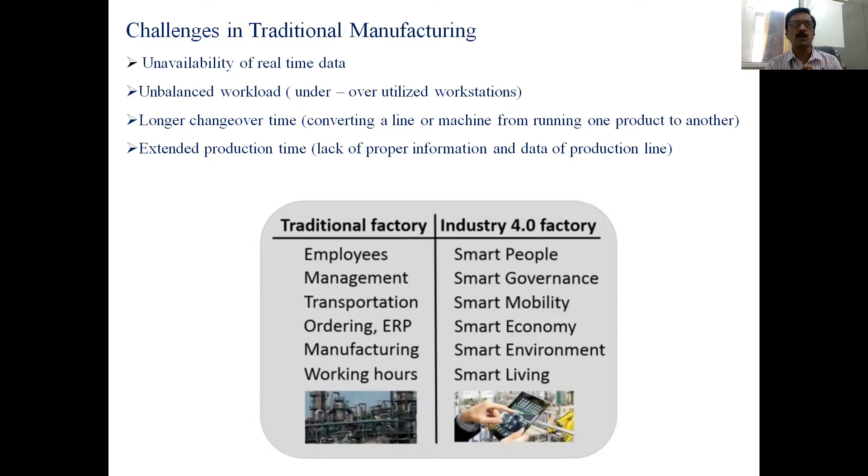There is extended production time, only because of the lack of proper information and lack of data of the production line. So if you just look at this traditional factory, we are having employees, management, transport, ERP, working hours, etc. But all these different parameters are not smart. Industry 4.0 expects all the things should be smart.

So what is a smart factory? The smart factory involves machinery and equipment which improve processes through self-optimization and automation. So self-optimization and automation, that is the main key of this smart factory.

So what will the smart factory do? It supplies real-time data. Each and every component, it may be a machine or it may be a human, so each and every component should give some real-time data.

The data analysis and the quality control of this data is very optimally done in a smart factory. It reduces changeover time, it reduces production time, it gives flexibility and easy management.

So if you just look at the picture, sensor-enabled tools and workers give data through some gateway, and it is stored somewhere in the cloud, and that data is rectified and analyzed. Out of that, 3D visualization - just now in the last session we have seen that part, 3D visualization of our factories. So that particular 3D visualization is possible through Industry 4.0 and smart factories.

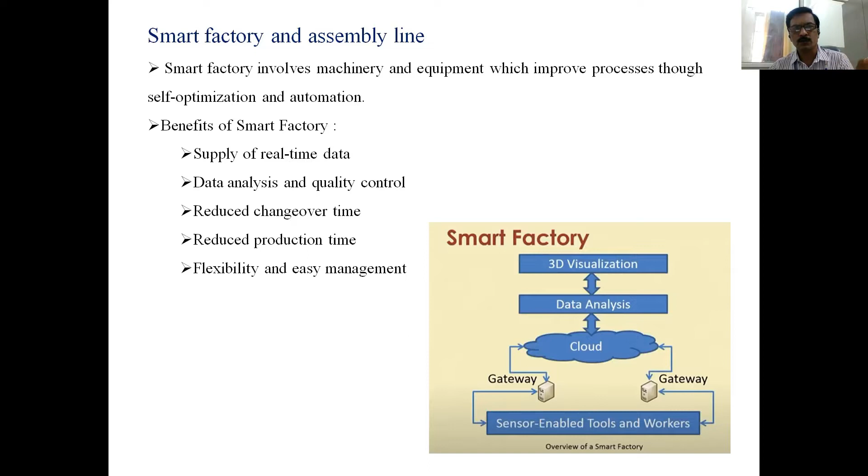If you just look at the features of smart factories, all these are connected together, all these are optimized. So there is very minimum manual intervention. There is transparency of this complete process. So when this transparency happens, quick decisions can be made by higher authorities because of this transparency. There is a predictive future outcome for taking preventive actions.

So this data will give some predictive future outcomes, and they are useful in a variety of preventive actions. The system becomes very flexible, agility is there, it has adaptability - we can adapt the system in different aspects. Here you can see the picture: each and every machine's data is gathered together and it is sent for processing. So this is the smart factory.

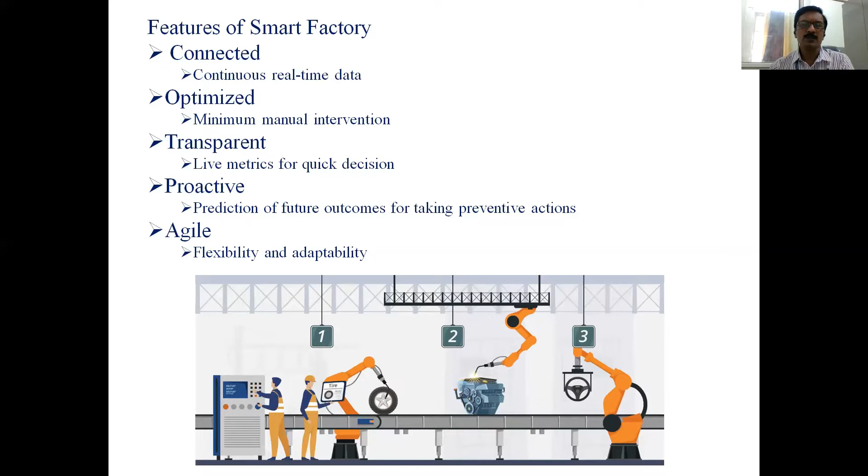Let us take what are the different factories and how this IIoT is helping all industries.

For manufacturing smart products, if I take an example of Airbus, now we know that Airbus is the well-known European company. It is a European aircraft manufacturer where the IIoT technology applied in this is not only on the shop floor, all the things are connected, but the flights are also connected.

So you can see how it works. So all the data, not only from the production line, what the machine is doing, what the worker is doing, in addition to that, the data from the flights. As we know, Airbus is going to manufacture many number of types of flights. So from this, all the vehicles, the data is collected, and that data is again useful.

A real-time data which is used by the workers on the shop floor, as it is IoT enabled by different devices. So Airbus has launched digital manufacturing initiative, which is called the factory of the future.

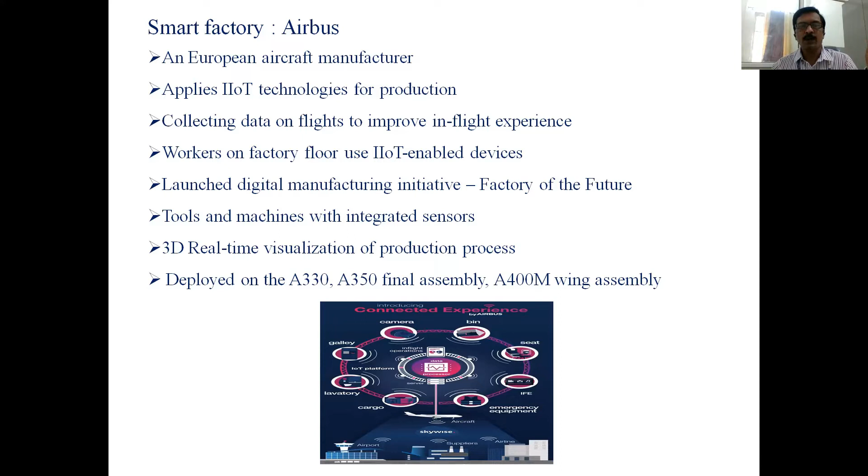Now let us take one more example. One more robot manufacturing company, KUKA Robots. This is also a German robotic maker. It builds a factory in which there are hundreds of robots connected by private cloud.

Why is it private cloud? It is also clear from the last session. The security of this data is very important. So all these robots are connected together, and this all connected robots are connected to the cloud.

And we can see performance wise, all your different kinds of production processes, all quality control, everything can be done using this connected data which is collected through this cloud.

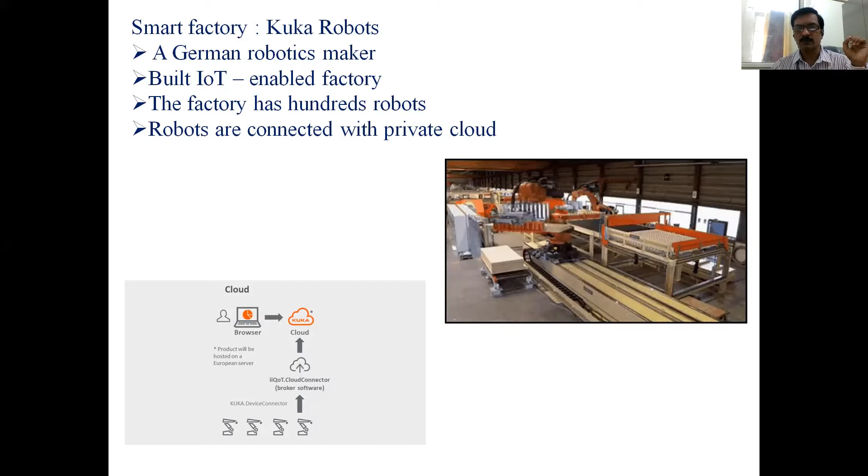Now one more example. So Dewalt, it is a construction tool manufacturer. In the construction industry also, as we know, the construction site is very huge site. So Dewalt has taken an initiative to launch IoT for a big area as large as a football stadium.

Whatever workers, whatever different tools which are working in that particular area are interconnected. So in our construction industry, the safety of worker, the safety of equipment is very, very important.

So here we can track workers and equipment. That's why we can have a clear-cut idea about where the worker is working, where the equipment is there. Is there any safety issues? Is there any maintenance issues? So all these things we can see on a simple device or at a single point. So that is the Dewalt company.

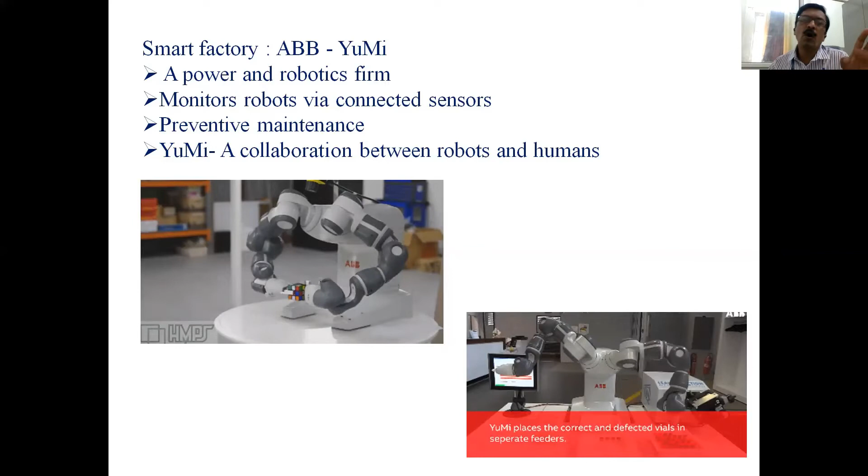This YuMi is one more smart device, a smart robot, which gives us all the connected data, and it also interfaces very, very easily with humans. The YuMi system again detects all the possible things that a human can detect. So the YuMi robot system is a very, very smart system.

You can see the puzzles and whatever color can be detected very easily by using this YuMi system.

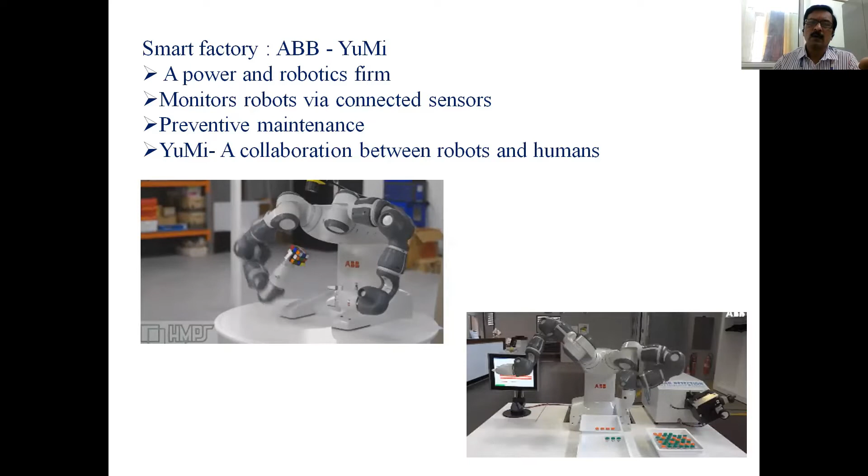The next, and everybody knows about Amazon. Amazon is one of the biggest e-commerce companies in the world. And there is a huge amount of product transport from one place to another.

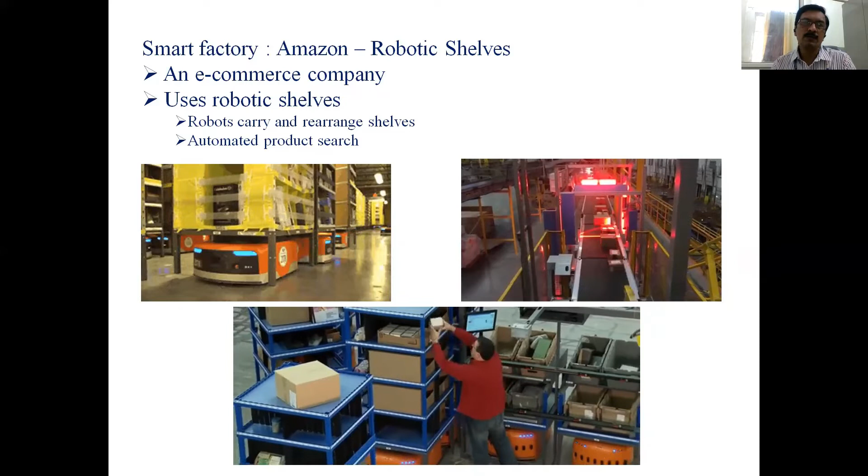Let us take one more example. I think all of you know about Caterpillar. Caterpillar is also a heavy equipment maker. As we know, whenever we say a heavy equipment maker, the maintenance of the vehicle and the safety of the vehicle

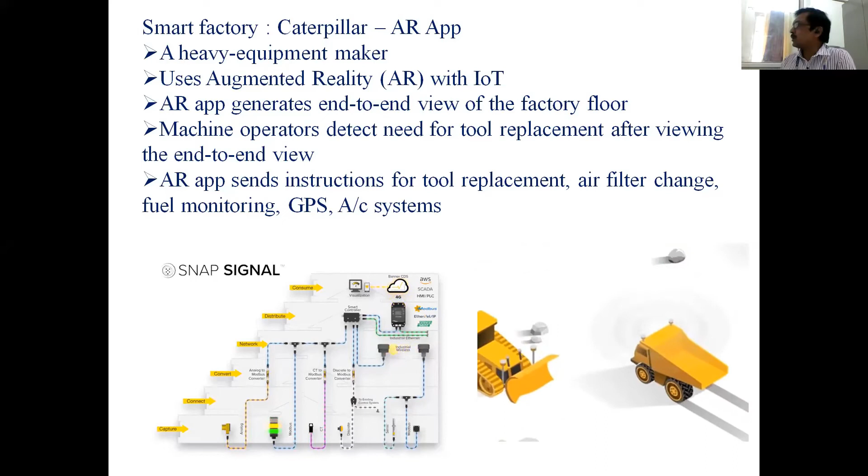is one of the major things. So Caterpillar generates an augmented reality app, which takes the view of all the factory floor. The machine operator detects need for tool replacement after viewing end-to-end view. The AR app sends instruction for tool replacement, air filter change, fuel monitoring,

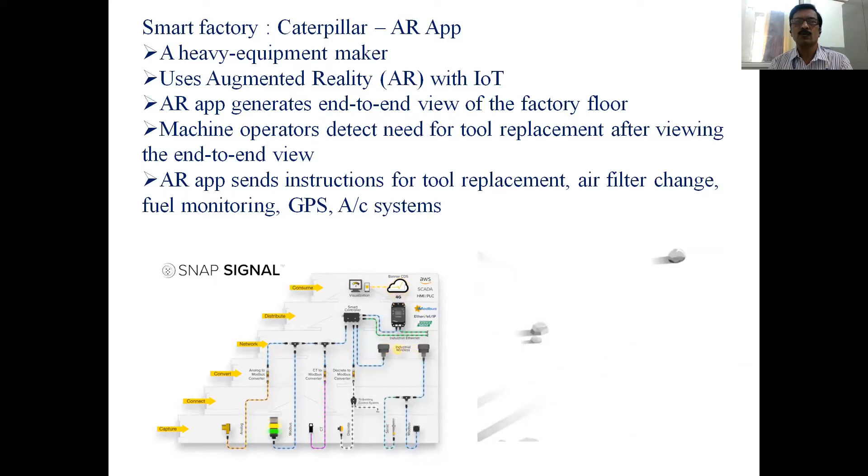air conditioning system, and everything. So each and every Caterpillar device is connected together, so that there should be easy machine operation, there should be preventive maintenance, there should be safety and everything. So this is one more example in which you can see how the AR app is working.

Let us take one more system. In this system, predictive maintenance is the main area which is covered under this IIoT. The FANUC zero downtime system is one of the cloud-based analytics which is built by taking different data from the sensor. So in this FANUC ZDT system, the data from different robots are taken simultaneously.

The data is analyzed. The different parameters in the robot are checked, whether the robot system needs oil, lubrication, grease, whether somewhere there is wear and tear, is there any mechanical failure, possible failure, is there any pressure, time or count that is going to disturb. So all these system health parameters are checked simultaneously by taking real data.

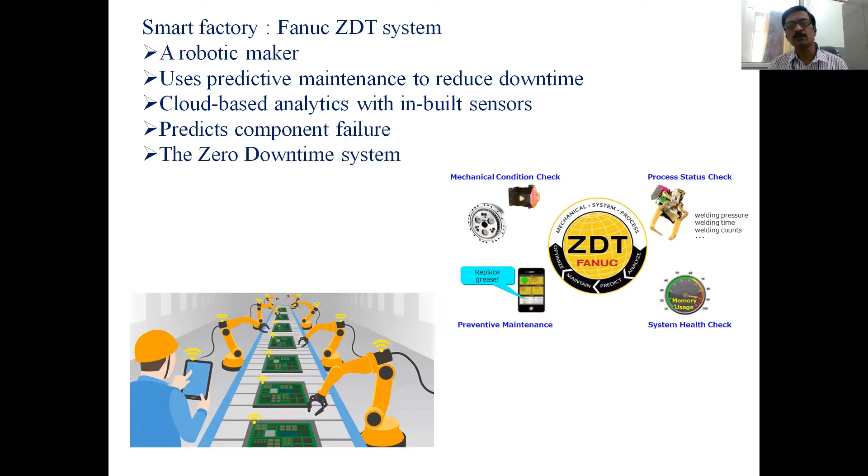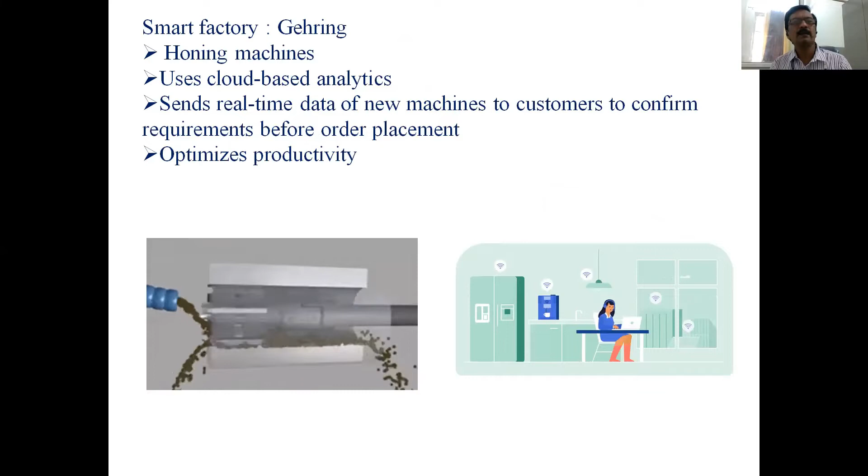So one more manufacturing company, all of you know Gehring. Gehring is the honing machine manufacturing company. So what has Gehring done? This honing machine always needs to have some input from the customer, because the machines are developed as per the requirement from the customer.

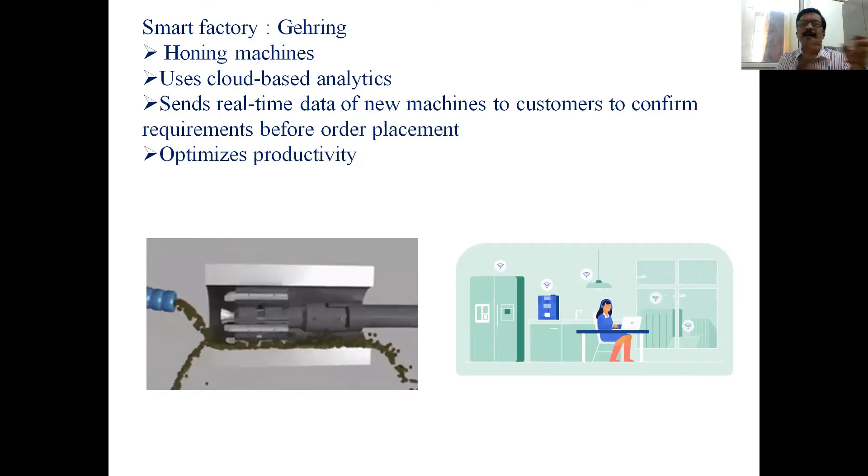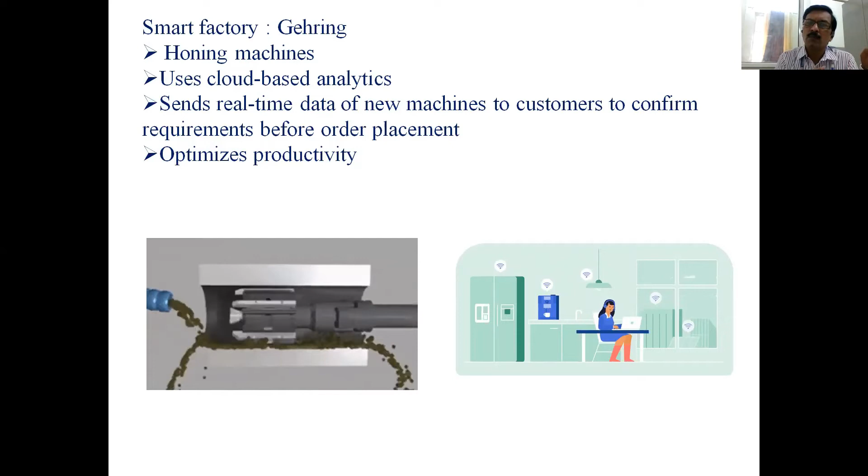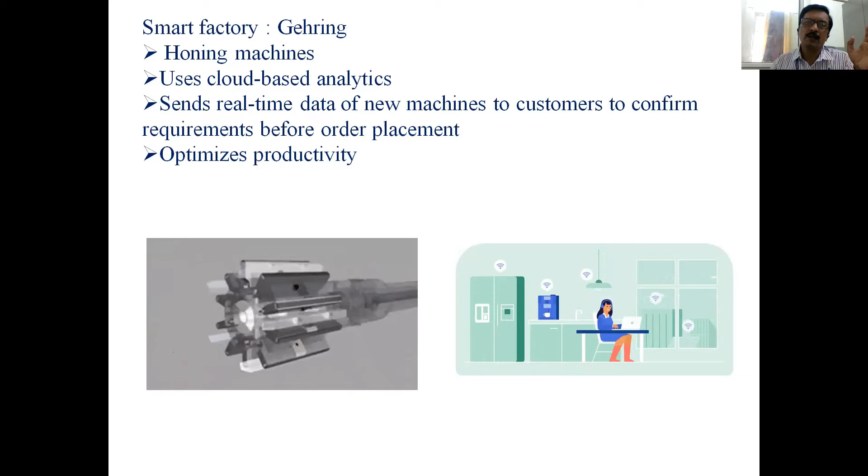So these honing machines are directly connected to the customer, and the real-time data of the new machines is given to the customer before the final order is placed. So it is called an optimized productivity system. It optimizes whatever happens in production and at what time. So that connectivity is done by the Gehring system, connected with the customer.

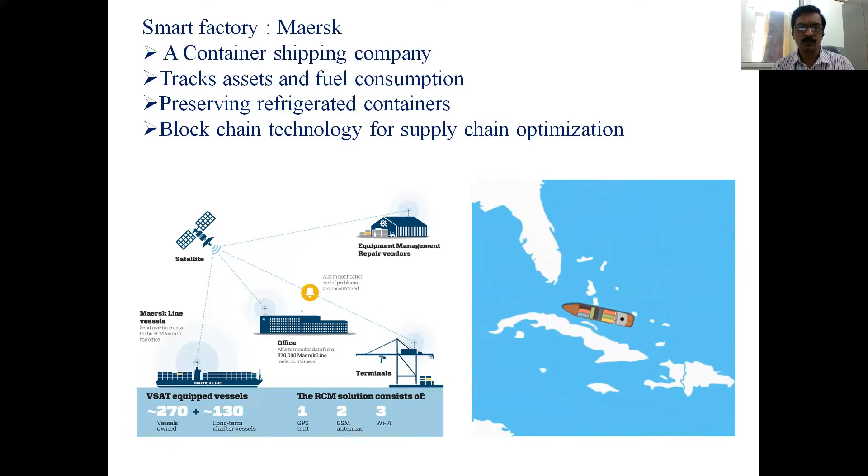So Maersk has developed a supply chain optimization technique by using IoT. Maersk has almost 270 own vessels and more than 130 charter vessels. All these different shipping vehicles and containers are connected together, they send data, they track the asset and fuel consumption and all the maintenance, they preserve the refrigerated containers, and they take data from those preserved refrigerated containers.

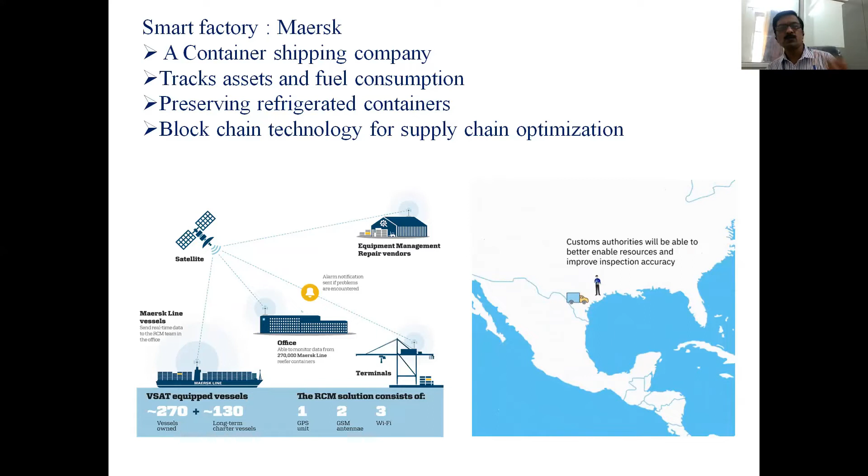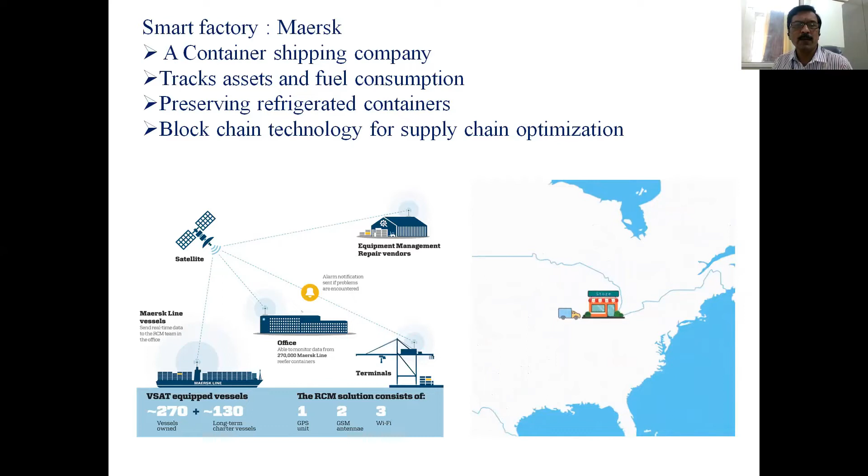Blockchain technology is used for the supply chain optimization in this Maersk company. This Maersk company is one of the biggest companies which supplies all the different containers from one place to another.

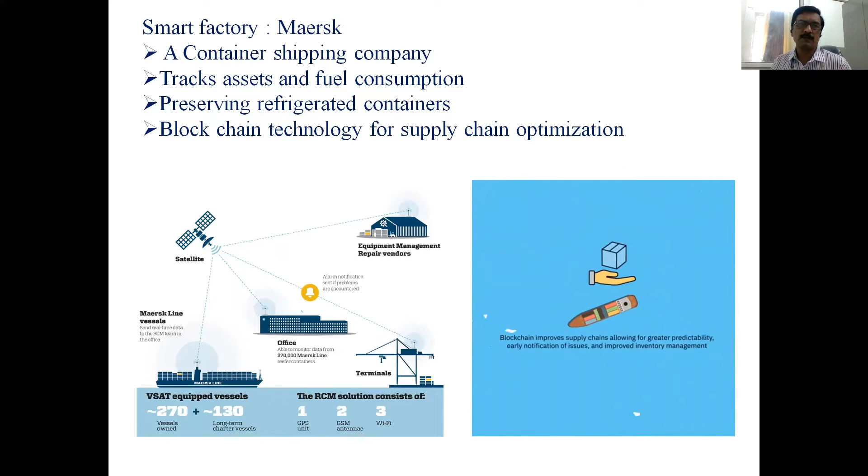One more example which is useful in our automotive industry: Magna Steyr, an automotive manufacturer, has used IoT technology for tools and vehicle parts. Employees in this automotive manufacturer company are using wearable technology tools and safety tools, and all these employees along with tools are interconnected to develop smart products useful in our day-to-day automotive vehicles.

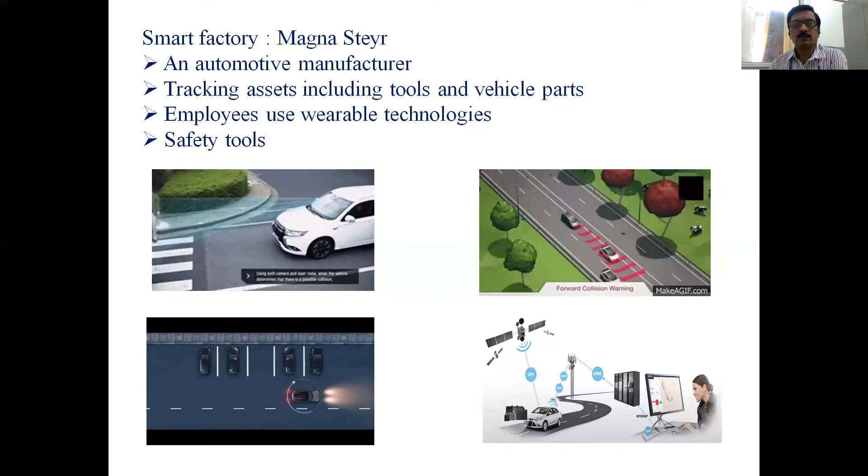IoT in the automobile sector is one more topic that we can take for 2 or 3 hours. So it is a very vast integration of IoT and IoT technologies.

Let us go further: North Star, a major supplier in the steel industry. We know that the steel industry has many safety issues - temperature issues, noise issues, safety of worker issues. So in such steel industries, each and every vehicle and its safety is very important. North Star has given wearable helmets and wristbands to all his workers.

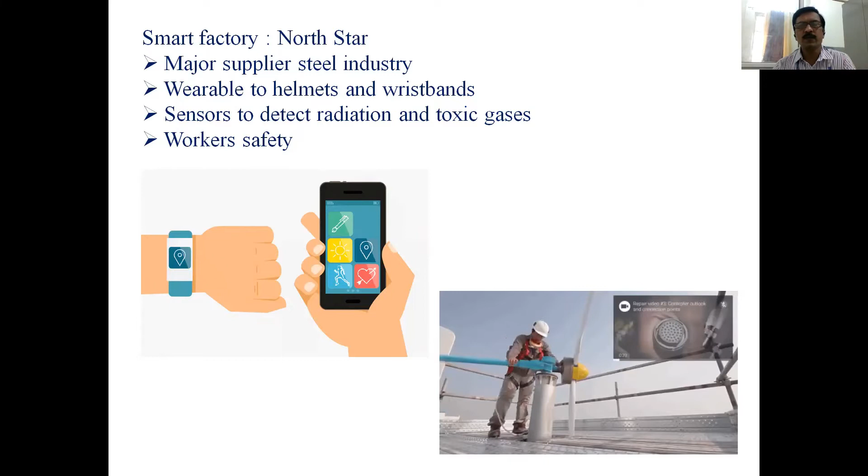There are sensors which can detect radiation, temperature, toxic gases, and they directly send signals. The signals and data which are connected can be gathered at one place, and decisions can be taken directly using that real-time data. So worker safety is first, and that is implemented using IoT in the North Star steel industry.

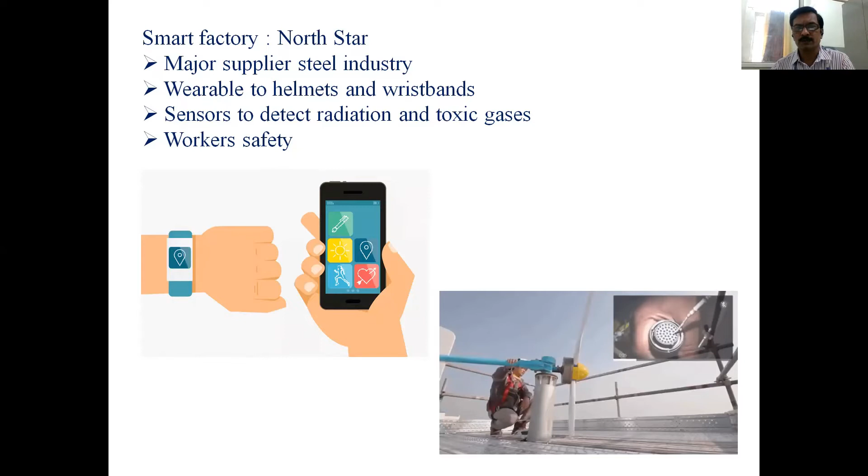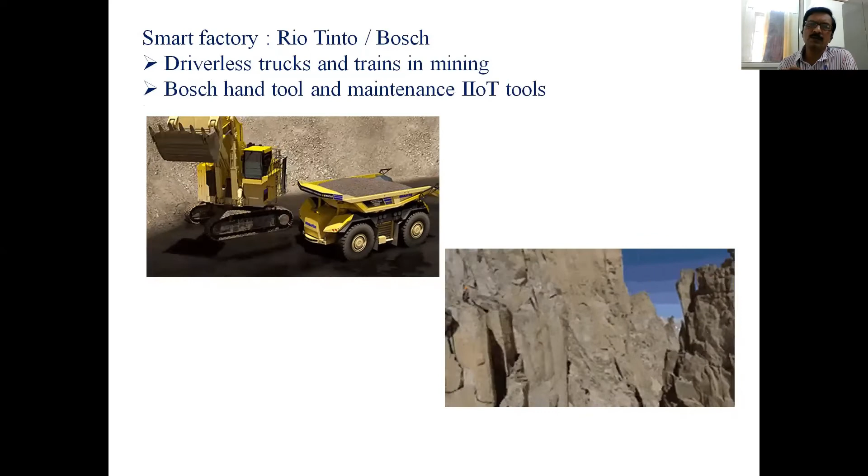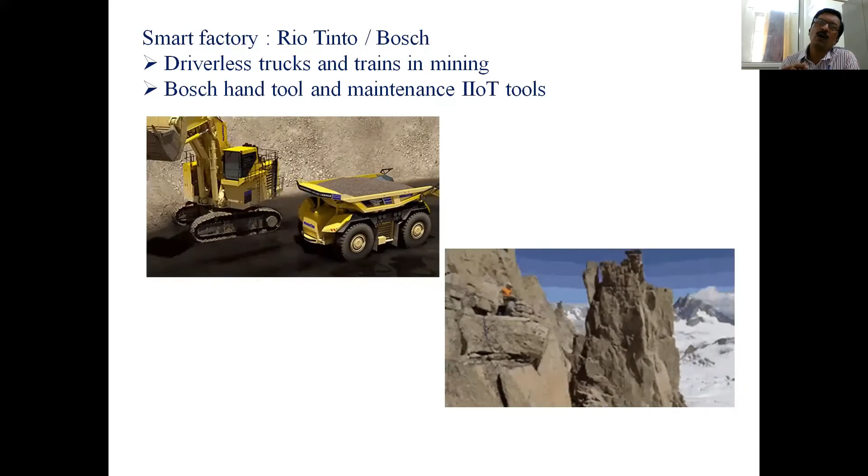Let us take a few more examples. Rio Tinto has a range of driverless trucks and trains in the mining industry. As we know, the mining industry is also one which requires all the safety and maintenance issues. So the driverless trucks and trains in mining are connected together. Real-time data is gathered, and we can track all the driverless trucks using the system. So that complete network is managed using simple IoT technique.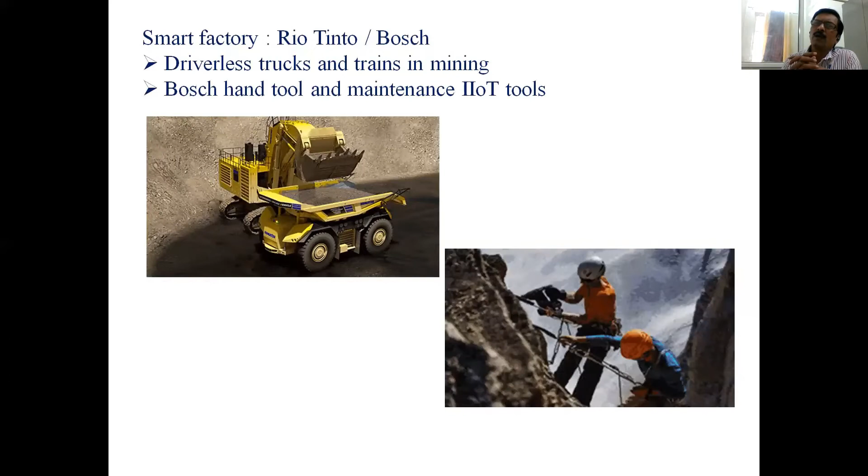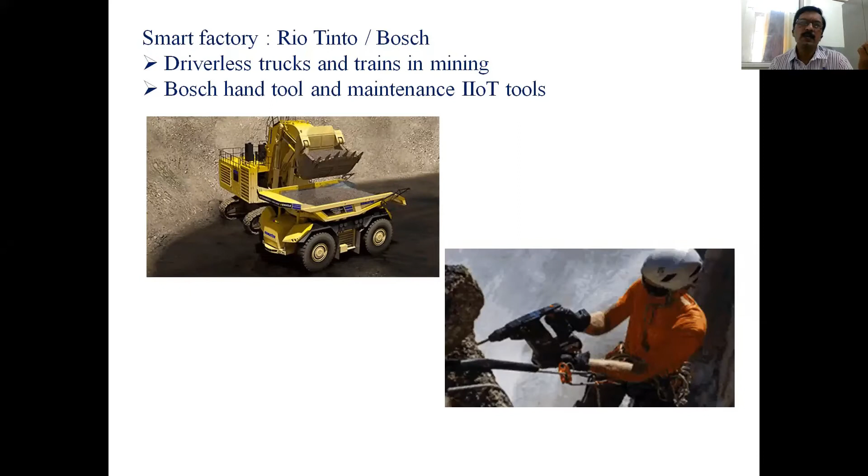We know that in mining, hand tools and their maintenance is also one of the issues. Bosch has taken initiative in maintaining these IIoT tools. The complete life cycle of the tool and the data from that complete life cycle is gathered together, and from that some preventive maintenance action can be taken simultaneously using this IoT technique.

So after these different manufacturing sectors, let us go for some more applications - smart food industry. As we know, the food industry is growing very fast, and food safety becomes very important as it is directly related to human safety.

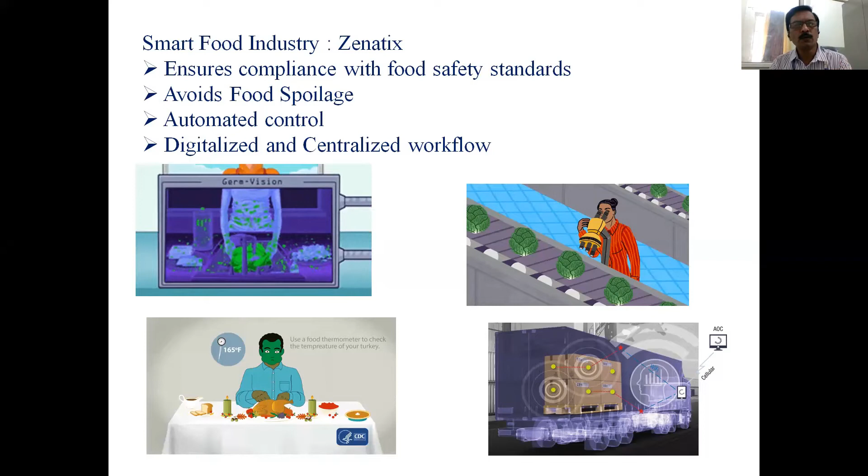Zenatix is one of the companies which works in food safety standards, food spoilage, automated control of food, and digitized, centralized workflow in the food industry. All this can be ensured using sensors, by monitoring all the food products and temperature, so that food spoilage can be avoided. So Zenatix is one of the industries which takes care of food for us using this IoT.

When we think about food, food is directly related to agriculture. Especially for agriculture equipment, Bosch has implemented Holmer. Holmer is the predictive maintenance technique implemented by Bosch for agriculture machineries. All this agriculture machinery is directly or indirectly connected together.

They are monitored every time, and the data collected from all the machinery is sent using this Holmer technique. Holmer uses this data and takes decisions as per the requirement. It also sends preventive maintenance actions through messages to the agriculture equipment owner, and whatever maintenance is required is made available through this Holmer system.

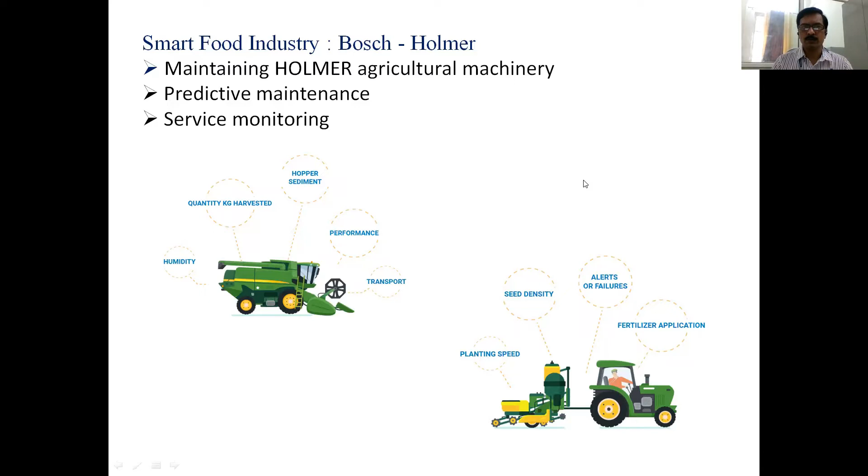Now, smart agriculture industry - smart agriculture is also one of the next eras. Walkera is the industry which is ahead and takes care of our crops. How is it possible?

It is possible by using sensors which monitor weather, crop maturity, presence of insects, and moisture available in the soil, optimize irrigation and fertilization levels, and the pesticides required. All these requirements of agriculture are monitored, sensed, and decisions are taken by this Walkera system.

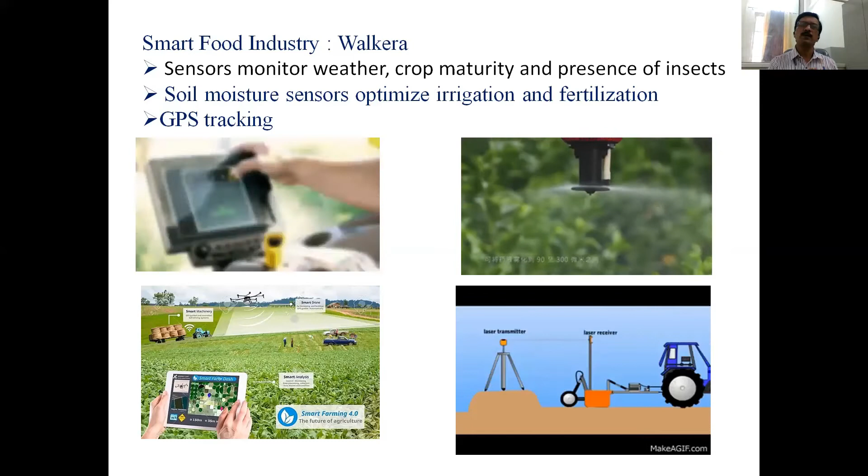A complete agriculture field is continuously monitored 24/7 by this Walkera system. They are using GPS tracking and drone devices to track the complete agriculture field. Whatever preventive action is required - if the crop needs water, pesticide, or fertilizers - all these decisions are sent by Walkera to the concerned agriculture industrialist. This type of device directly and indirectly increases food quantity and quality, and it is used to minimize different kinds of losses.

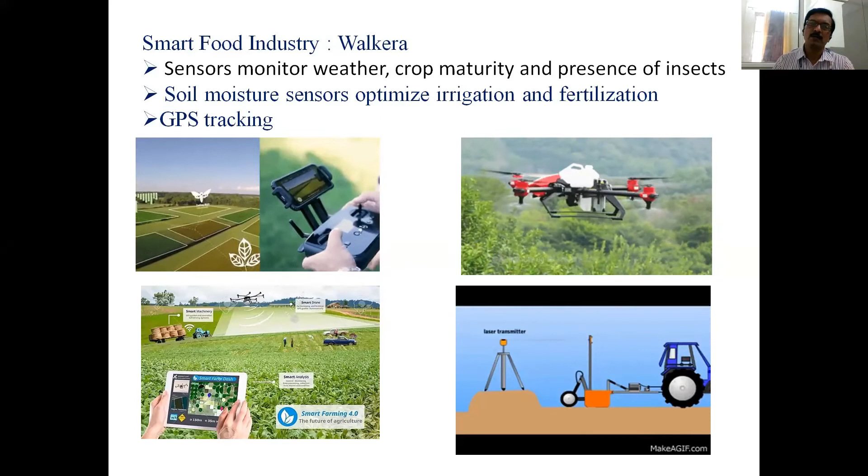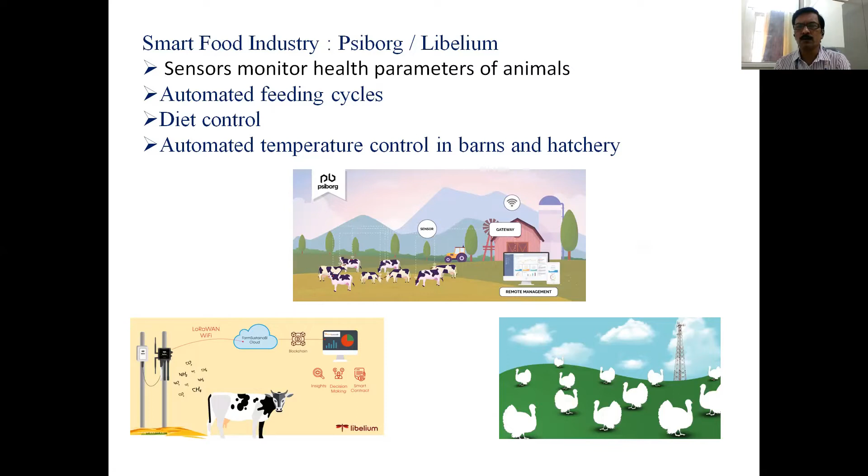So how does it work? They are using sensors. Now each and every animal is connected together. How much food has been taken by each animal, and what is the temperature of that animal - everything is controlled by using this variety of sensors.

Now let us go further. There is some smart label system. If you go anywhere in the market, you'll find some smart QR codes. That QR code not only gives you information about the price, but smart QR codes are available which give all the information about the product - what is the main ingredient inside, is there any allergen exposure, what are the nutrition values, and whatever advisory information related to the product safety and many more.

So whenever such smart labels are used, they directly connect the customer to the factory. What is the choice of the customer? Which type of product is selected by the customer? What is the need of the customer? Which type of customers are available in which area? All these things - the information is gathered from the customer and sent to the factory. So this type of smart QR code connects customer to the factory. It helps for the quality assurance of the product, and it reduces time to market.

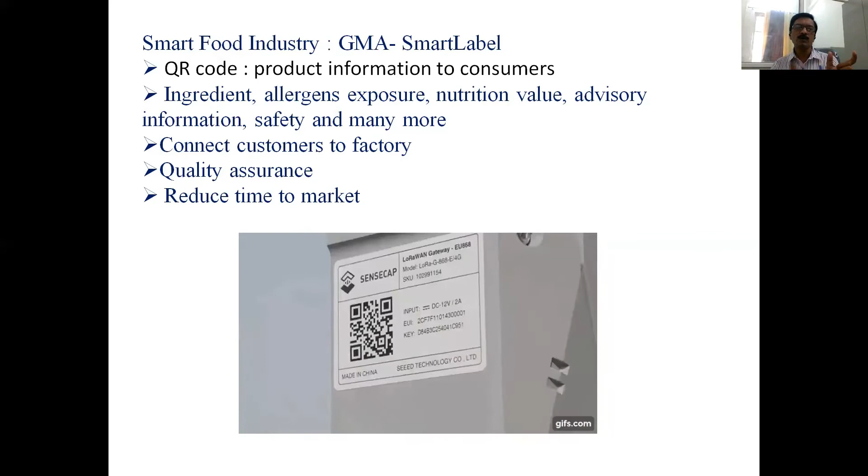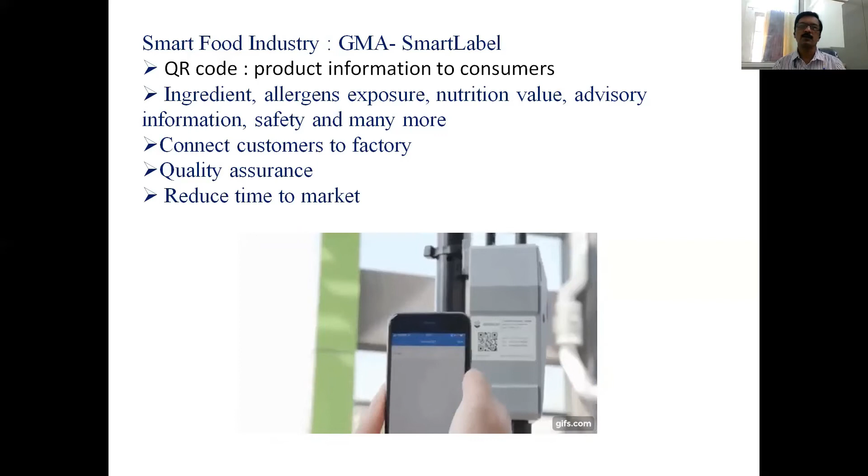The time to market is one of the big concepts which we will explore in the near future. Time to market covers what is the need of the market and how much time it will take to come into the market. This time to market is very important in future industries.

Now, if we go further, there are some smart devices and smart industry products available which will take care of your indoor garden. CityCrop is one company which they call an intelligent indoor garden. As we know, we're going to develop some indoor garden - we grow fruits, herbs, vegetables, and flowers at home also. Climate control, temperature control, moisture control - all these controls are very important when we think about such indoor gardens. City Crop is one company which is going to take care of this climate control, and live monitor all our crops and different small plants. It is just like our plant doctor.

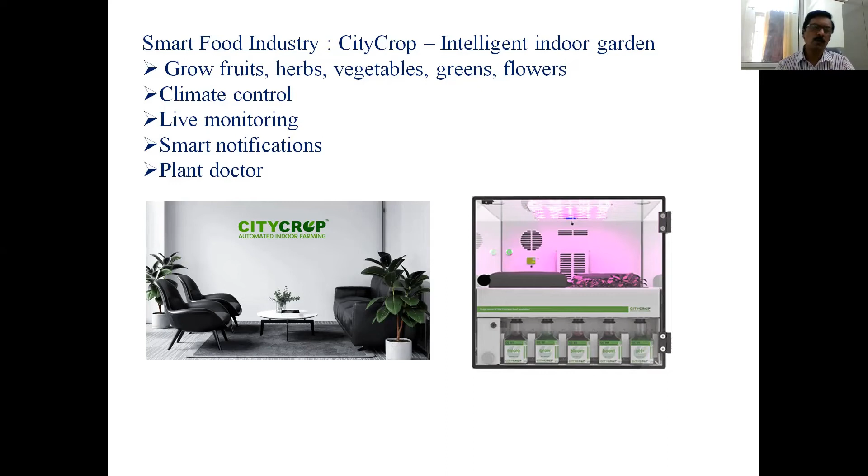City Crop takes data from our indoor garden. The real-time data is monitored, optimized, and decisions are taken and sent, and actions are also conducted as per the decision, so that our garden can be monitored with minimum or no manual intervention.

Whenever we put some food item, it detects pathogens in the food. It analyzes the food, and if there are pathogens in the food, it directly gives an alert through some app. That app is connected to the cloud system, and the cloud system gives the complete action that could be possible for that food item. This BioRanger system is developed by Digenetics, one of the companies which has made BioRanger available for us.

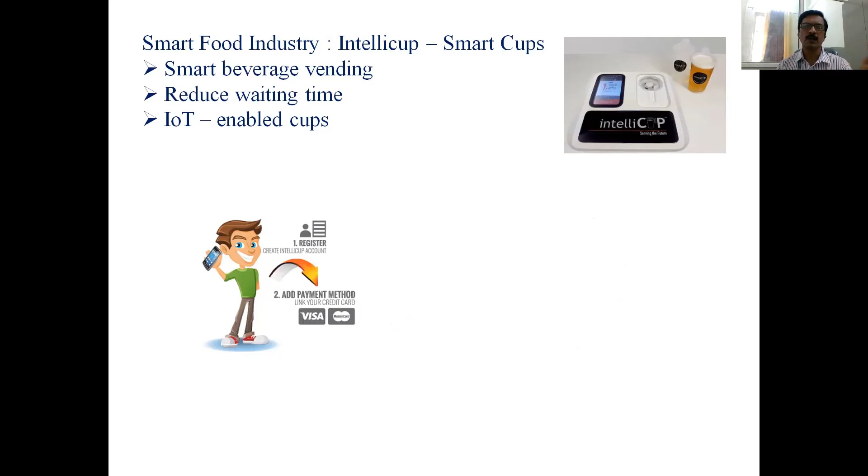This is a smart intelligent cup. It will sense what order is given by which customer. It's a simple IoT enabled cup which senses everything that we need, and you can enjoy the particular drink without wasting your time to order. There is a waiting period, and all this can be reduced very easily. So this is Intellicup.

Now let us go with another type of IoT application - the health industry. It is going to become one of the big industries in this IoT application sector, and the adaptability of IoT in the health industry will be the biggest percentage in the next few years. We know that up to 2050, almost 60% of the world population may have an average age more than 60.

It is predicted that 60% of the population may be there, those having an average age of 60. So it is a big challenge that these people should get some medical assistance. Every time, a huge amount of people cannot go to the hospital or monitor their health condition. So we need a complete IoT system which monitors each and every person, and they can get medical facility whenever they want.

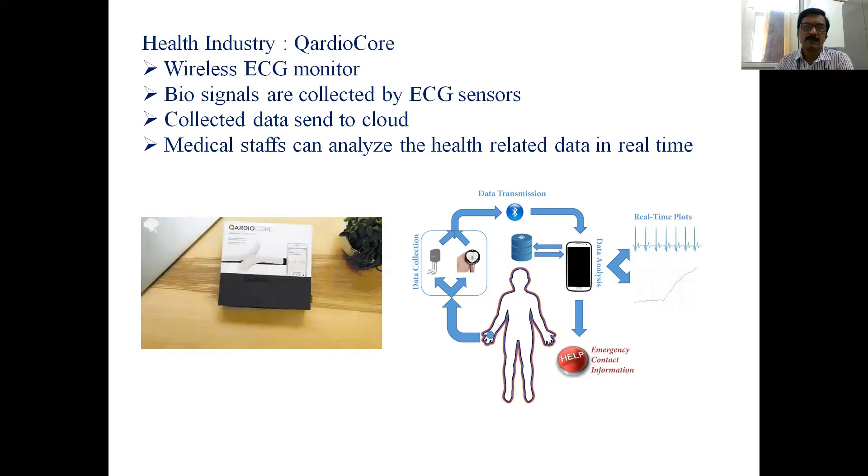Again, we know that the blood pressure monitoring system is also needed, as every time our health is related with blood pressure. The ups and downs in the blood pressure, if they are within the threshold, then it's okay. But if it is going beyond a certain limit, then some medical assistance is required.

iHealth BP5 is one of the industries which is ahead in this IIoT connection. This device is going to monitor the blood pressure and send the data to the cloud. Whatever data is sent to the cloud is given to the doctors, and the medical staff is going to monitor the real-time blood pressure.

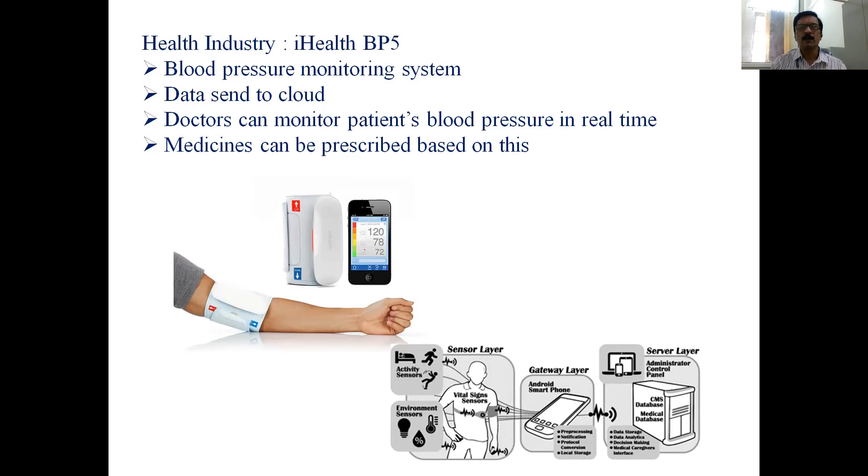One more company, as from the last almost 2 years, everybody knows about this oximeter, how oxygen is important for us and how to monitor that we have learned, because the oximeter is a common device that we know.